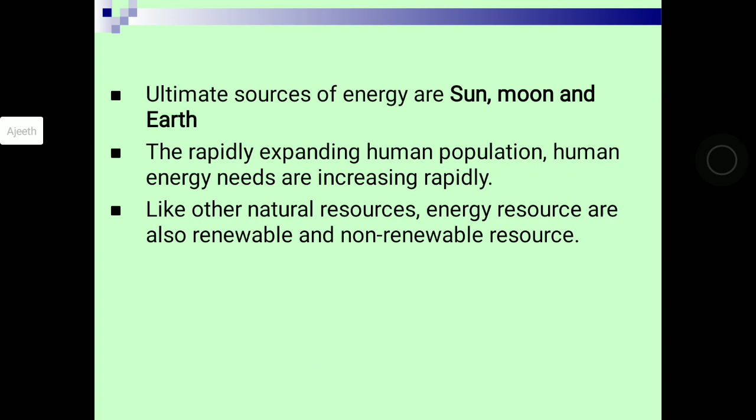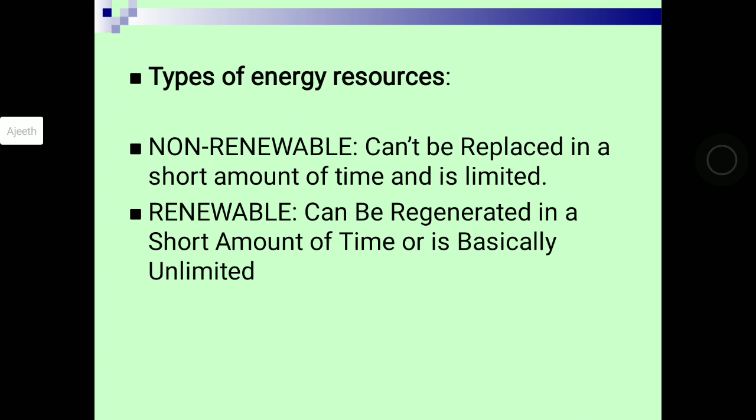So, types of energy sources. Just to refresh your mind: non-renewable means they can't be replaced. Renewable means they can be replaced, regenerated, or rejuvenated.

Some of the non-renewable energy sources are fossil fuels, for example coal, lignite, crude oil, natural gas, nuclear energy, uranium, thorium, and others used in fission reactions. There is something called half-life, there is radiation, and in uranium there is fission of the nucleus, which gives some energy output. It's kind of deep into the syllabus, so we will not get into that.

So, renewable energy resources: solar energy, what do we use mainly? That is electromagnetic radiation from the sun. Wind energy from moving air. Hydropower is the energy from falling water, that is nothing but kinetic energy. Tidal energy, the energy associated with the rise and fall of water. Tides are mainly created due to the gravitational push and pull because of the earth and moon.

Next, geothermal energy, the heat from underground steam. We have the core of the earth, it is very hot inside, but on the upper layer it's cool, we have to be thankful for that, so on and so forth. Then biogas energy and biomass energy, which come from waste, mainly methane gas.

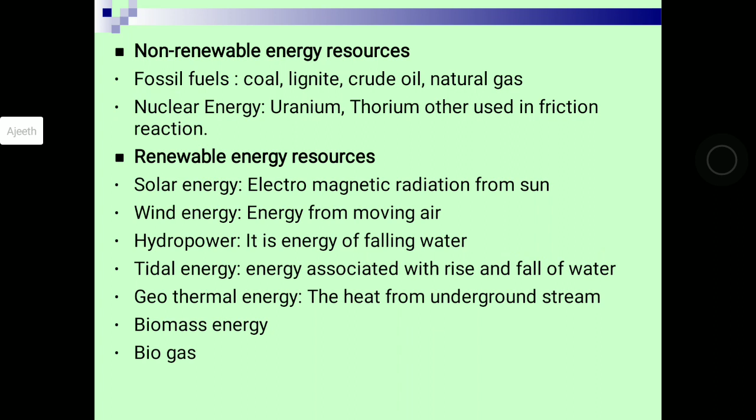So, different sources of energy, what we actually get: oil is 33%, coal 22%, natural gas 21%, nuclear power 6%, that's very less, but still there are so many disadvantages with nuclear power, so let's limit to that. Biomass or biogas 11%, hydropower, geothermal, solar and wind together 7%, that's all.

See those, oil, coal, all those things are non-renewable, and we are mainly depending on that itself. India especially is lagging behind in conservation of energy and also usage of energy in terms of oil and coal. We actually import it from other countries, we are not self-sufficient as of now, right? So in total, non-renewable energy usage is 82%, renewable is 18%.

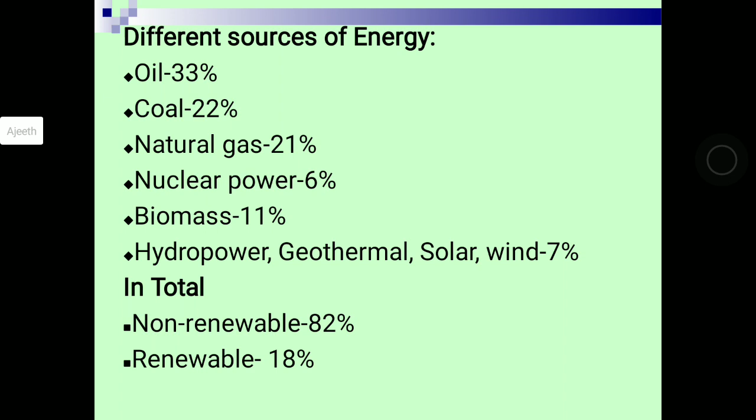So, classifications of the energy sources. Conventional sources are the ones which are used in common by all of us, for example fuels, electricity, etc. Non-conventional sources are energy resources which are not used in common. So we can't see it everywhere we go.

There are no... wind, what do we say that? Uh, tidal winds, I'm sorry, I forgot the name. Okay, we'll come back to it later. We'll take the next example.

We can't see dams everywhere, right? We can't see geothermal power everywhere. We can't see tidal energy everywhere, right? But in the same way, fuels like petrol and diesel, we can see everywhere, right?

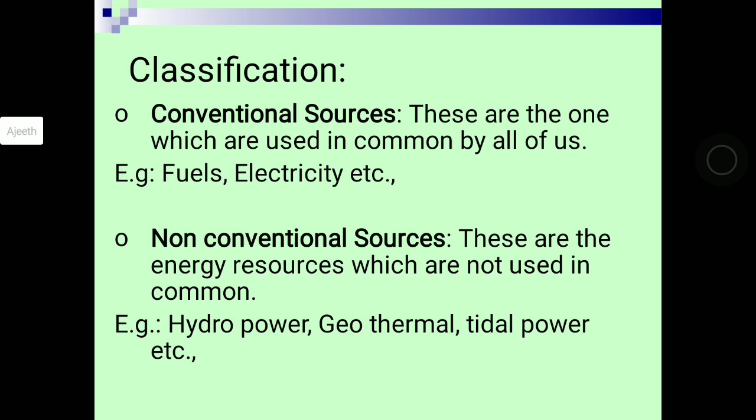So we will get deep into hydroelectric power. Electricity produced from water power is known as hydroelectric energy, as simple as that. The energy of falling water captured and converted to mechanical energy by a water wheel, that is nothing but a turbine, powered the start of the industrial revolution.

Okay, it is a good thing and a bad thing, the industrial revolution, whatever happened.

Next, large scale hydropower. In this case, a high dam is built across a large river to create a reservoir. Water is allowed to flow through huge pipes laid along steep hill slopes, controlled at rates that spin turbines.

Small hydropower involves a low dam with no reservoir, or only a small one, built across a small stream, and water is used to spin a turbine to produce electricity. Even smaller than dams, these are called bunds. Approximately one-fourth of the world's electricity is produced by hydropower, so that's a good thing.

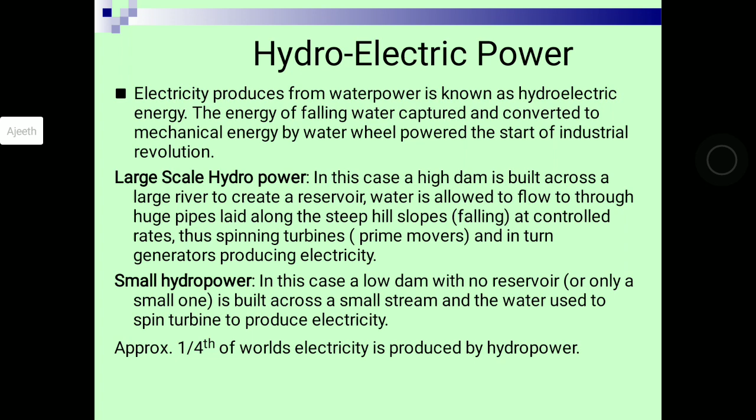In India, the generation of hydroelectricity has been emphasized right from the beginning of the first 5-year plan. Those were the agendas in the first 5-year plan. By the end of the fourth plan, India was able to generate 6.9 thousand megawatts of hydroelectricity, contributing 42% of total power generation capacity. That is huge, that is a good thing.

But due to increasing demand, by the end of the 8th plan, it fell down to 25%. The population growth is very high in India, so that has to be controlled first. But that is the problem we have been facing, and in turn it is indirectly affecting electricity production also.

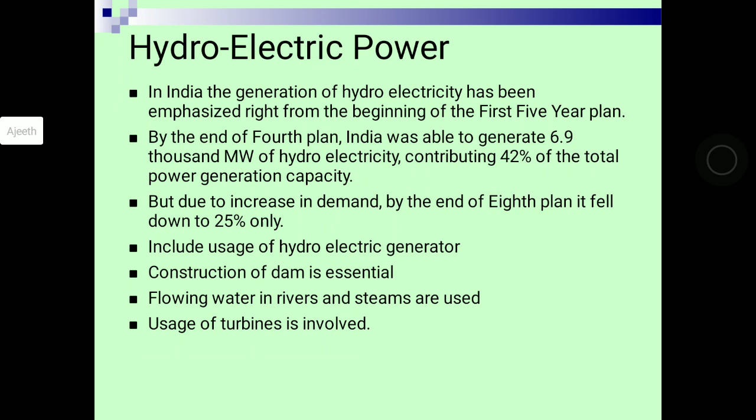So this includes the use of hydroelectric generators. Construction of a dam is essential. Flowing water in rivers and streams is used, and turbines are involved in hydroelectric power in the scenario of India.

If you remember the resultant force, sine theta, cos theta from the elements of civil engineering, that is applied here too. If you want to see a curved dam in India, you can go to Idukki Dam in Kerala. It is very beautiful, but you can't take pictures inside.

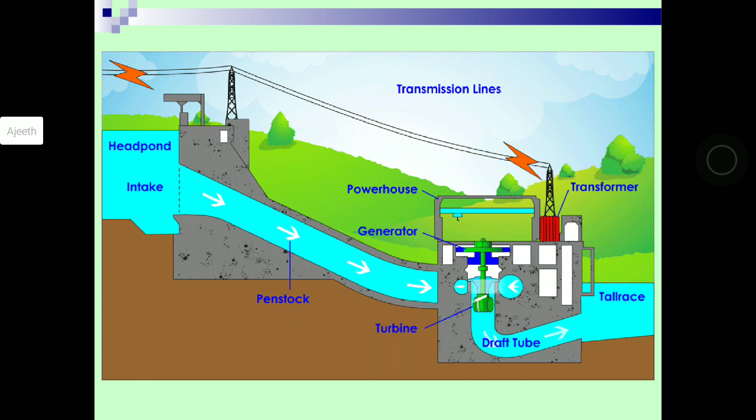Next source of energy is nuclear power. Nuclear energy is a non-renewable source of energy which is released during fission, or disintegration, or fusion, that is the union, of selected radioactive materials. So nuclear power appears to be the only hope for large scale energy requirements when fossil fuels are exhausted.

But nuclear energy again has so many disadvantages. If something goes wrong, there is a huge threat to society. So you can also watch Chernobyl.

It's a very nice mini series available on HBO, or you can also download it through torrents, I guess. It has 5 episodes. It's very good, knowledgeable and entertaining. You can watch it — in the context of nuclear power itself, I'm saying, I'm not saying don't study, binge watch it.

The major advantage is that even small quantities can produce an enormous amount of energy. A very small quantity is enough to produce a very large amount of energy. There is also something called half-life: up till a certain point it will degrade to a certain extent, and after its half-life it will degrade slower, going on for thousands and thousands of years once the fission or fusion reaction has started.

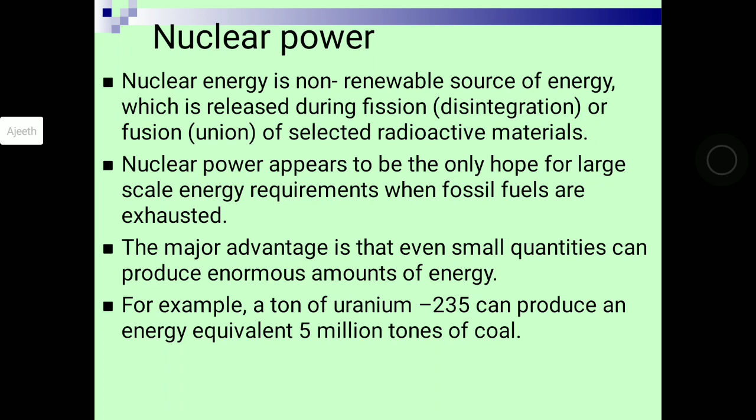Nuclear energy has been successfully used in generation of electricity in spaceships, marine vessels, and chemical and food processing industries. There is a nuclear power plant in Kaiga, which you can visit if possible.

In nuclear fission, the nucleus of certain isotopes with large mass numbers splits into nuclei of nearly equal mass, with release of enormous energy on bombarding by neutrons. I have a figure showing what actually happens. There are certain isotopes with large mass, and when they are bombarded with each other, they collapse or start to blast, and that reaction causes energy to be released, which is then taken up.

In nuclear fusion, two isotopes of lighter elements are forced at high temperature until they form a heavier nucleus, releasing enormous heat. This reaction happens so rapidly we can't actually see it, but two isotopes combine with each other to form a larger material. Because of that collision, a higher amount of heat or energy is released. Uranium, thorium, and plutonium are the major sources.

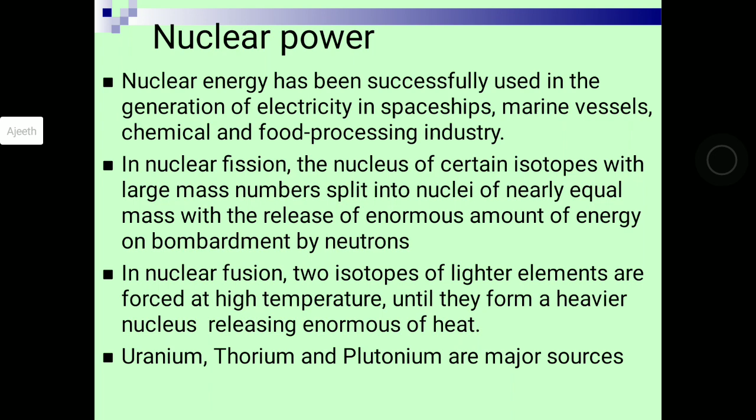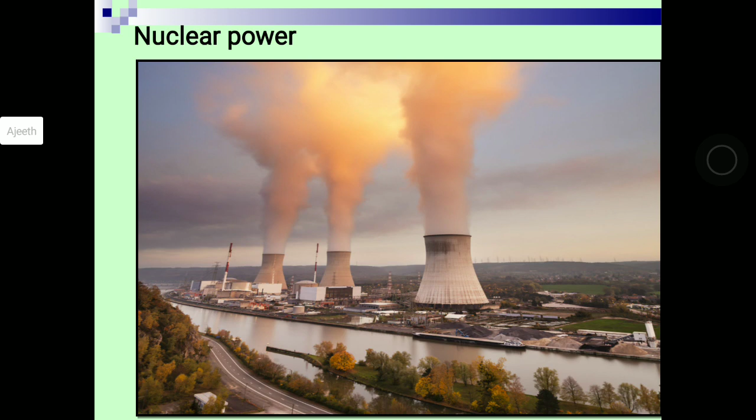This is a beautiful picture of a nuclear power plant. As you can see, these are the cooling towers. Whatever gas-like thing is coming out is not smoke and is not polluting anything. Because of the heat generated, cooling of the towers has to be done, and at that time we get an enormous amount of water vapor. So this is all water vapor, not pollution. Please keep in mind, this is not gas, not a harmful product, just water vapor, which is completely harmless.

So this is how it is. There is a neutron and a target nucleus. The white one is the neutron, and there is a fission product. One neutron hits the target and goes out like an arrow, and because of that you can see a suppression in the target nucleus. Because of this hitting, we get energy.

Next, this is fusion. As you can see, these are the light elements, that is helium, and one more, tritium and deuterium. They both collide with each other. It is forcefully done, and when two things are combined it is called fusion, and because of the fusion we get heat or energy, as simple as that.

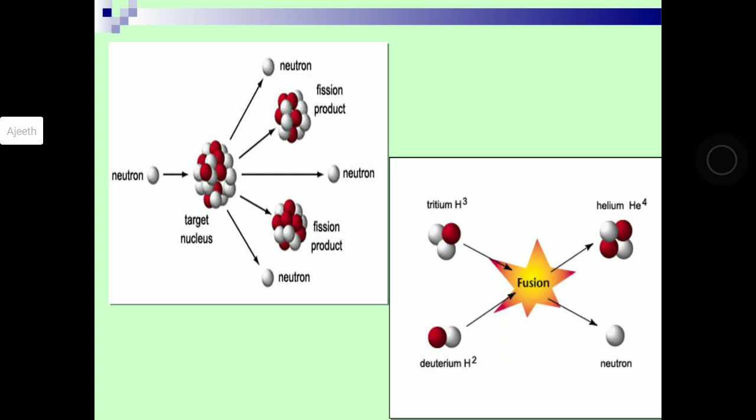Mainly in India, nuclear plants are situated in Kalpakkam in Tamil Nadu, Kaiga in Karnataka, Tarapur in Maharashtra, BARC in Mumbai, Narora in UP, and Manuguru, not Mangaluru, so Manuguru in Andhra.

So what are the hazards? If you feel the lecture is boring, please watch the Chernobyl series, you will get all the hazards actually.

Uranium mining causes radioactive pollution and health hazards for mine workers. Nuclear materials remain in the surroundings for many centuries. They are called nuclear cells, and once we are done with them, they have to be cooled down since they are radioactive elements to start with. They are very radioactive, and people cannot live with such radiation.

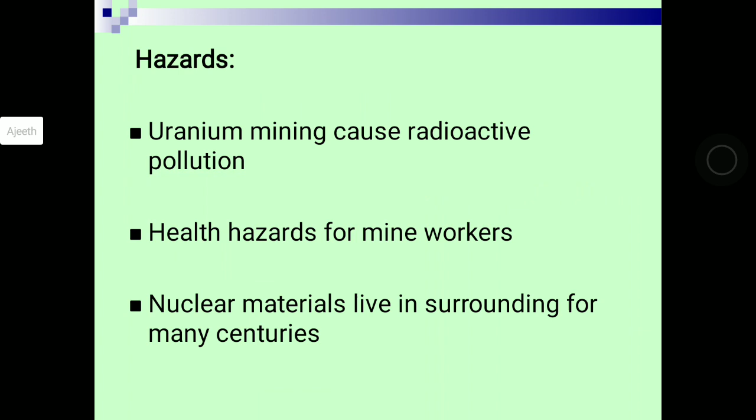On the moon and elsewhere, the radioactive energy coming from the sun is about 500 times more than on earth, it seems. I had just read it in the news two days ago. We are not actually capable of sustaining such radioactivity, so it has to be handled very carefully, cooled down, and maintained. There is so much maintenance involved.

As you can see on earth, the radiation effect is spreading. The black part, whatever you can see, is the radiation effect. However much quality control has been going on, it's not enough. There should be much more.

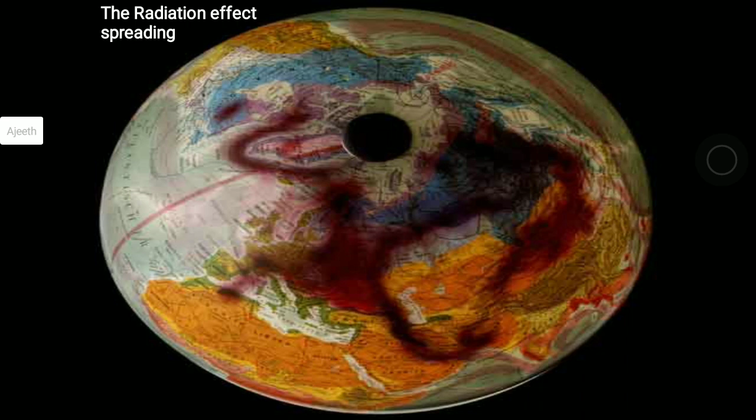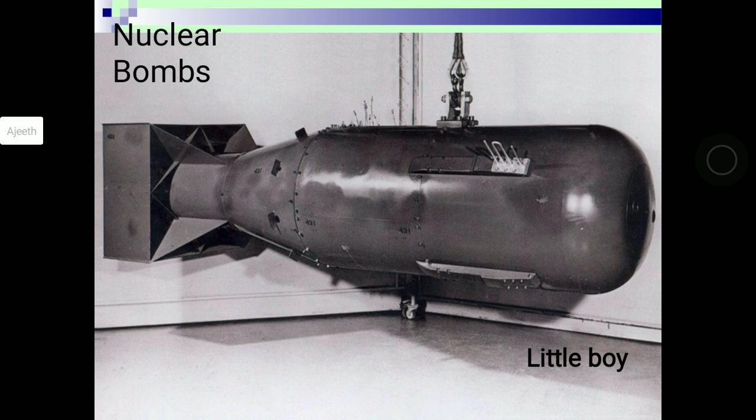The energy in the wind turns 2 to 3 propeller-like blades around a rotor. The rotor is connected to the main shaft, which spins a generator to create electricity. Wind turbines are mounted on a tower to capture the most energy. This is the main shaft, and these blades are called propellers.

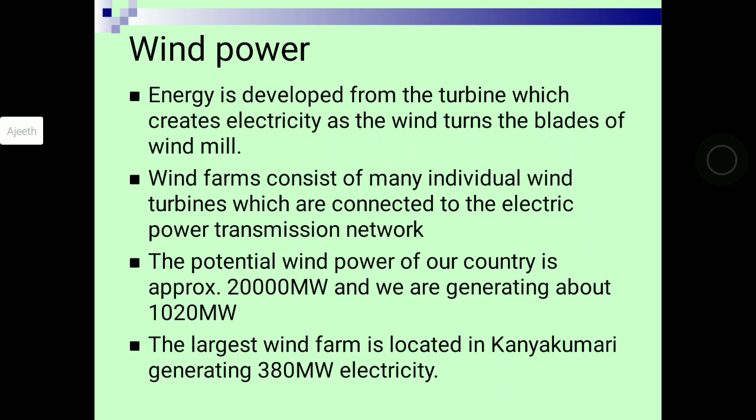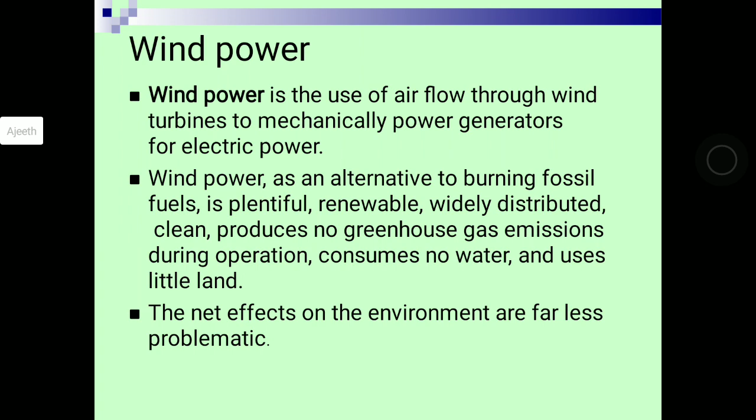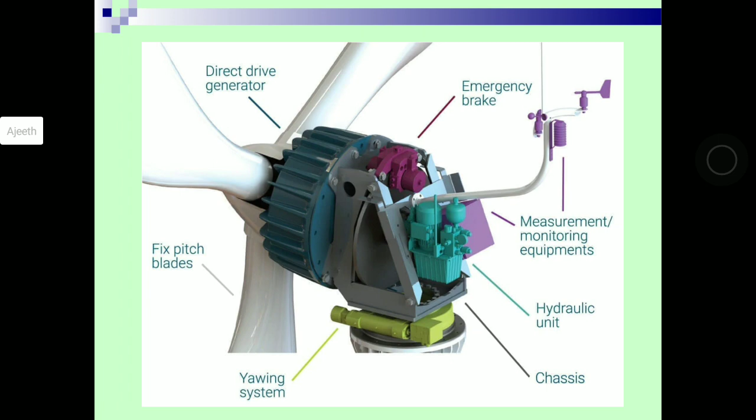As you can see, these are the fixed pitch blades. We also have the emergency brake, hydraulic unit, and chassis. This is just for your information, you can see this.

So how does a wind turbine work? A wind turbine operates on a simple principle: the energy in the wind turns the propeller-like blades around a rotor. As you can see here, this is the rotor, these are the blades, pitch, and this is the tower. You can pause the video and go through this: blades, rotor, pitch, brake, everything is named properly.

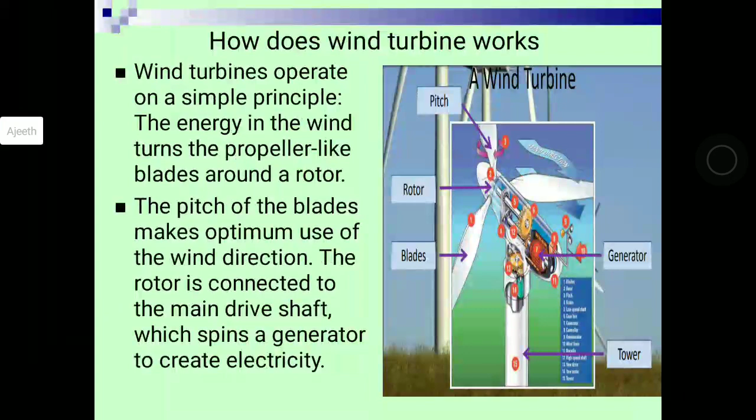The energy in the wind turns the propeller-like blades around a rotor. The pitch of the blades makes optimum use of the wind direction. The wind rotor is connected to the main drive shaft, which spins a generator to create electricity. Wind turbines are mounted on a tower to capture the most energy at 30 meters or above, so they can take advantage of faster and less turbulent wind.

If there is turbulence, the efficiency of the wind energy will be less, so that is not feasible or economical. Turbulence is low in higher ground or higher altitudes. Wind turbines can be used to produce electricity for a single home or building, or they can be connected to an electricity grid for more widespread electricity distribution.

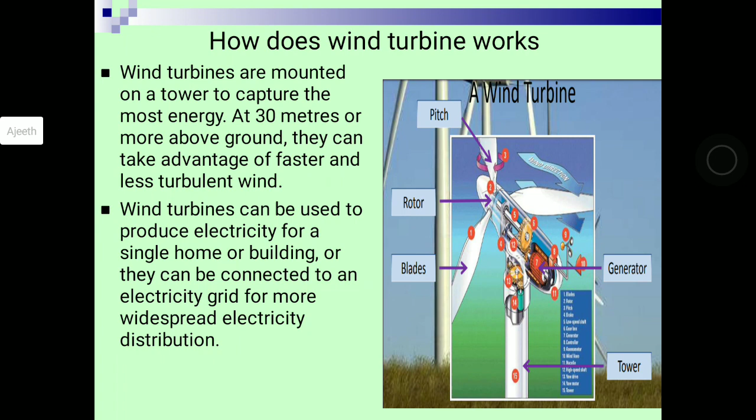Again, just for your information: onshore and offshore wind turbines or windmills. A regular onshore turbine lasts about 20 years, and an offshore wind turbine is stronger than an onshore turbine. It lasts around 25 to 30 years, producing about 50% more energy than an onshore turbine, but onshore has a cheaper foundation.

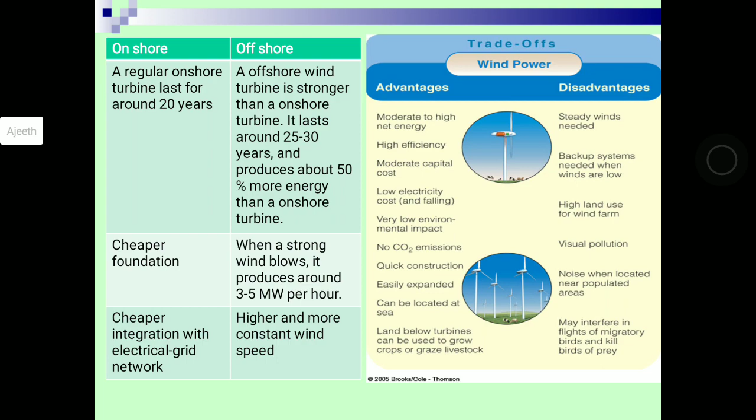Offshore, when a strong wind blows, it produces around 3 to 5 megawatts per hour. Onshore has cheaper integration with the electrical grid network, but offshore has higher and more constant wind speed. So it's mainly about trade-offs, what do we get, what do we lose, advantages and disadvantages. Let us see.

Moderate to high net energy, but it needs steady winds. It has high efficiency, but a backup system is needed when winds are low. So again we are giving energy. Moderate capital cost, but we have to use a lot of land. Low electricity cost and very low environmental impact, but there is visual pollution.

Sometimes when you go somewhere it would look good, but if you're staying there itself, it would look very bad, the windmills, right?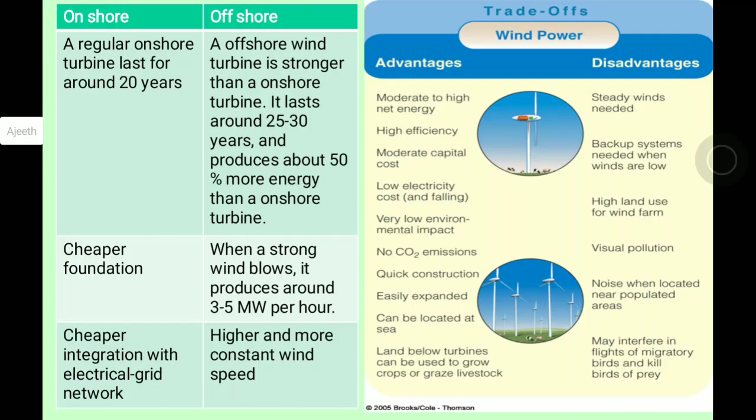But again, advantages: no CO2 emission, quick in construction, easily expandable, can be located at sea. But in the disadvantages, again, noise when located near populated areas because of the turning of propellers, right? And also interference with birds or migration of birds, and many birds are killed during the generation of wind energy.

Let's go to the next one, that is tidal energy. Ocean tides are produced by the gravitational forces of the sun and moon. There is an attraction force between sun and moon, so because of that we get tides, so that we can go to beaches like Tannirbhavi, or many other beaches in Mangalore. I can't remember it as of now, I don't know why.

So tidal power or tidal energy is a form of hydropower that converts the energy obtained from tides into useful forms of power, mainly electricity. Tidal energy is an alternative energy that can also be classed as renewable energy.

That is because you might have seen Panampur beach and all, or even Surathkal beach, or wherever the tides are always coming in. So we can see that it is a renewable source of energy, as Earth uses the gravitational force of both the moon and the sun every day to move vast quantities of water around the ocean, producing tides.

Although not yet widely used, tidal energy has potential for future electricity generation. As of now it is not used much because it has to be laid in the tides or in the deep ocean, so humans are not very advanced yet to take maximum efficiency out of that.

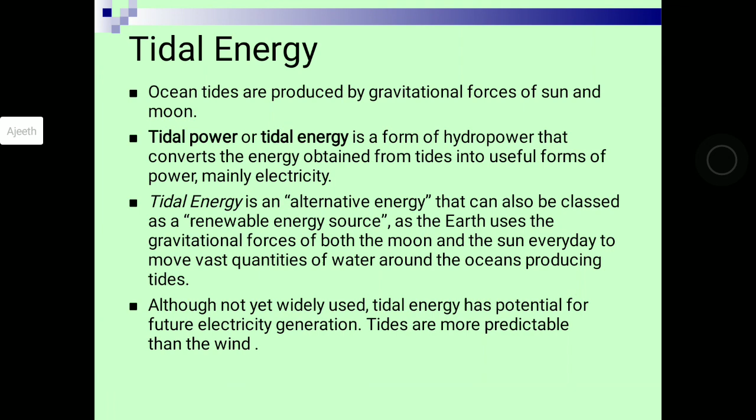Tides are more predictable than wind, so that is a good thing. Since the position of the earth and the moon with respect to the sun changes throughout the year, we can utilize the potential energy of water contained in the daily movement of rising and falling sea level to generate electricity.

The generation of electricity from tides is similar in many ways to hydroelectric generation. The difference this time is that water flows in and out of the turbine in both directions instead of just one forward direction. A difference of several meters is required between the height of high tide and low tide to spin the turbines.

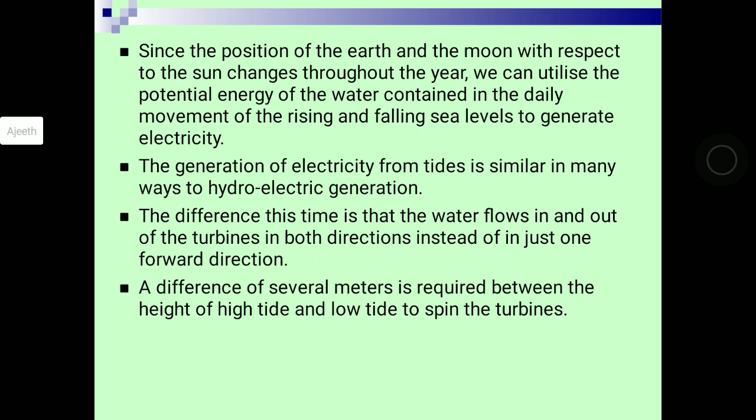I will show the picture or a GIF so that you can understand it more easily. As you can see, 1, 2 and 3: first, the water moves in and out past the turbine as tides ebb and flow. Next, turbines turn the generator module, producing electricity. Third, electricity is returned by underwater cables for use ashore. That's all, it's a very easy one, right?

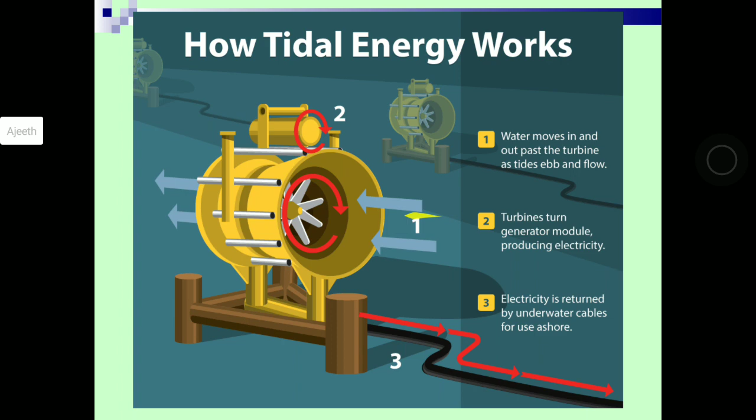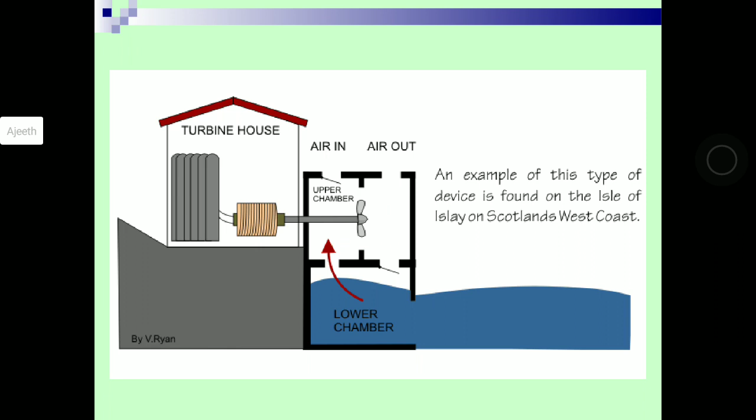So there is always tides and there can be energy throughout. This is one of the better pictures. As you can see, there is a turbine house, there is air in, air out. An example of this type of device is found at the Isle of Islay in Scotland's west coast. As you can see, there are tides, and because of that the whole thing will be filled with water and the turbines will move.

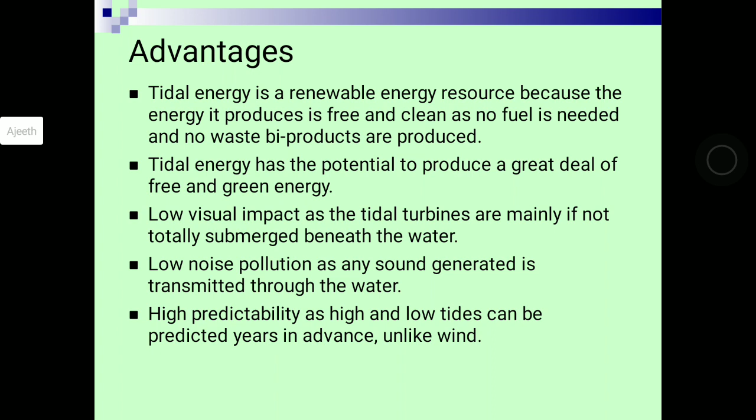So what are the advantages? Tidal energy is a renewable energy resource because the energy it produces is free and clean, as no fuel is needed and no waste byproducts are produced. Tidal energy has the potential to produce a great deal of free and green energy. It has low visual impact, as tidal turbines are mainly or totally submerged beneath the water. We want the tides to be moving vigorously so that there will be spinning of the turbine. Next, low noise pollution, as any sound generated is transmitted through water. High predictability, as high and low tides can be predicted years in advance, unlike wind.

Now we will come to the disadvantages. Tidal energy is not always a constant energy source, as it depends on the strength and flow of tides. We want tides to be vigorous, but they will not always be so strong. Tidal energy requires a suitable site where the tides and tidal streams are consistently strong, and equipment must withstand the forces of nature, resulting in high capital construction and maintenance cost.

As you know, it is seawater, and seawater has salts which cause corrosion, so there is high maintenance. It also gives danger to fish and other sea life, as they get stuck in the barrage or sucked through the tidal turbine blades. So animals get hurt, and when fish migrate from one place to another, they usually get confused.

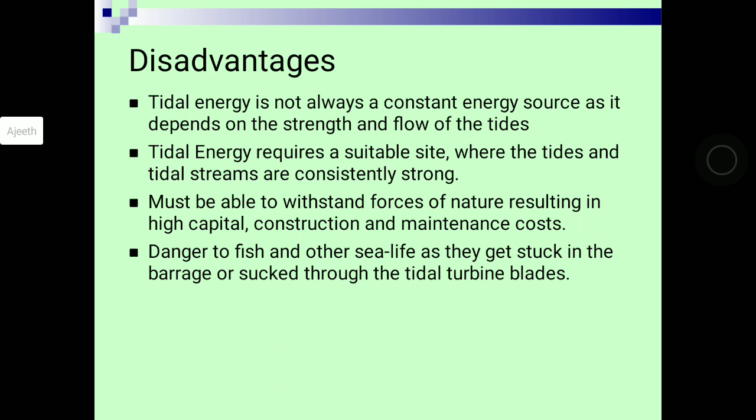So next, another kind of renewable energy we can take is electromagnetic radiation. Electromagnetic radiation is energy in the form of waves due to changing electric and magnetic fields. Where is it coming from? The sun. There are different forms of electromagnetic radiation, each with different wavelengths. Cosmic rays, gamma rays, X-rays and ultraviolet radiation are known as ionizing radiation because they have energy to knock electrons from atoms and change them into positively charged ions. So they are very, very dangerous.

They are dangerous to human beings if exposed for a high or certain amount of time. But as of now, we have the ozone layer and the atmosphere, which are protecting the earth from harmful radiations of the sun. The resulting highly reactive electrons and ions can disturb living cells, interfere with body processes, and cause many types of sickness, including various cancers.

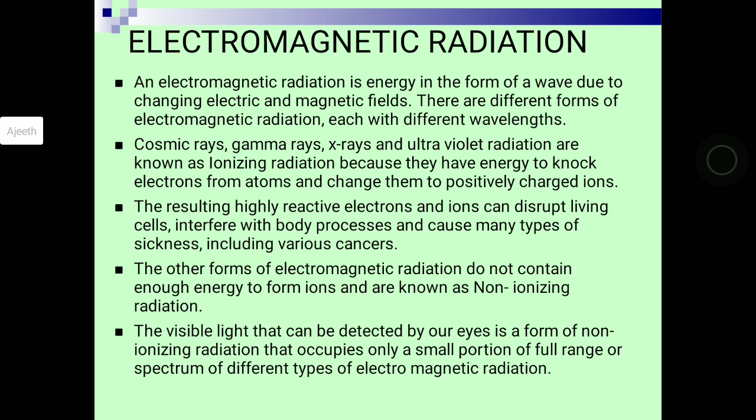The other forms of electromagnetic radiation do not contain enough energy to form ions and are known as non-ionizing radiation. The visible light detected by our eyes is a form of non-ionizing radiation from the sun, which is not ionizing, so it is not hurting us. It occupies only a small portion of the full spectrum of electromagnetic radiation. High energy radiation has short wavelengths so it can penetrate through material, while low energy radiation has long wavelengths and is non-ionizing.

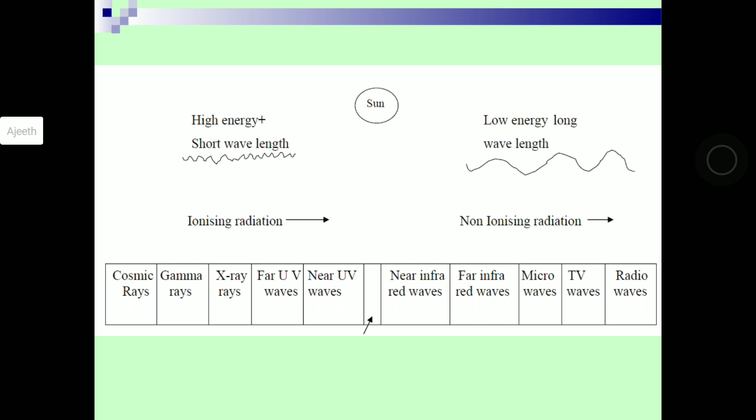So ionizing radiations are cosmic rays, gamma rays, X-rays, UV waves - that is far UV waves and near UV waves. The arrow shows where our human eye can see. After that, non-ionizing radiation includes near infrared waves, far infrared waves, microwaves, TV waves and radio waves. You can hear Radio Mirchi or Red FM because of radio waves, and TV waves - now it is all dish, but before that it was with antennas. Microwaves are used to cook food, and infrared waves are used in the remote controls of TVs.

Next we will go to non-renewable resources, that is fossil fuels. Fossil fuels are energy-rich substances that formed from the remains of organisms that lived 200 to 500 million years ago. If you are a paleontologist, you would know about the dinosaurs as well. During this stage of Earth's evolution, large amounts of dead organic matter collected over millions of years. This matter was buried under layers of sediment and converted by heat and pressure into coal, oil and natural gas.

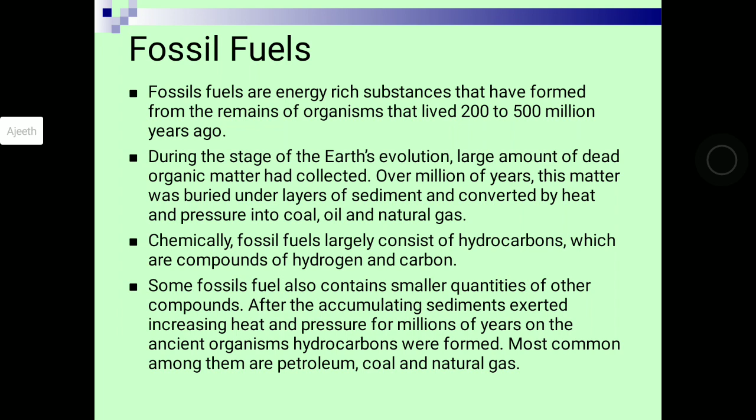Chemically, fossil fuels largely consist of hydrocarbons, which are compounds of hydrogen and carbon - that's what they have. Some fossil fuels also contain smaller quantities of other compounds. After accumulation, sediments exerted increasing heat and pressure for millions of years on the ancient organisms, and hydrocarbons were formed. The most common among them are petroleum, coal and natural gas.

The majority of fossil fuels are used in transportation, industries, heating and generation of electricity. Crude petroleum is refined into gasoline, diesel and jet fuel that power the world's transportation system. Coal is mostly used in generation of electricity, what we call thermal power. Natural gas is used for commercial and domestic purposes like heating, air conditioning, and as fuel for stoves and other heating appliances.

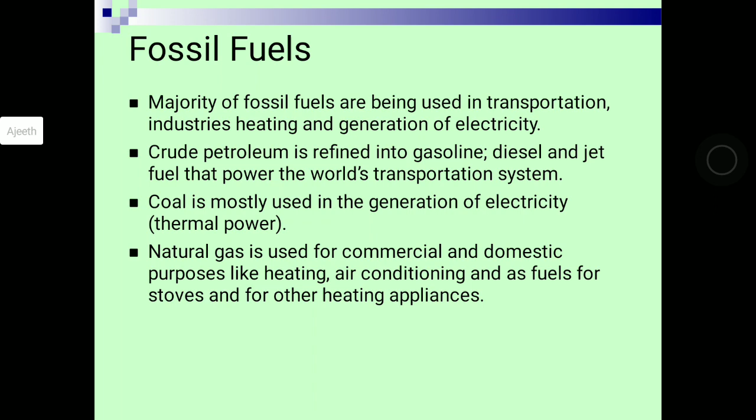So next, after fossil fuels, we come to coal. Coal is a solid fuel formed in several stages as buried remains of land plants that lived 300 to 400 million years ago and were subjected to intense heat and pressure.

Due to intense heat and pressure, organic matter got converted into coal over millions of years. There are three main types: anthracite, bituminous and lignite. Anthracite has 90% carbon, bituminous coal has 85% carbon, and lignite has 70% carbon.

Transportation and combustion of coal leads to air pollution. The more carbon content, the more pollution. Purification may lead to secondary pollution again, as there are always byproducts involved, so we skip the purification part too.

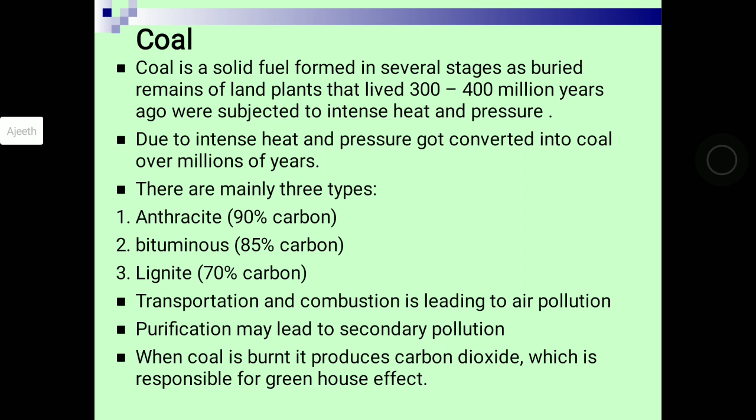When coal is burnt, it produces carbon dioxide, which is responsible for the greenhouse effect.

Almost 27350 billion metric tons of known coal deposits occur on our planet, out of which 56% are located in Russia, 28% in USA and Canada. India has only 5% of the world's coal reserves, and that too not of very good quality in terms of heat capacity. West Bengal, Jharkhand, Orissa, Andhra Pradesh, Madhya Pradesh and Maharashtra are the major coal producing states in India.

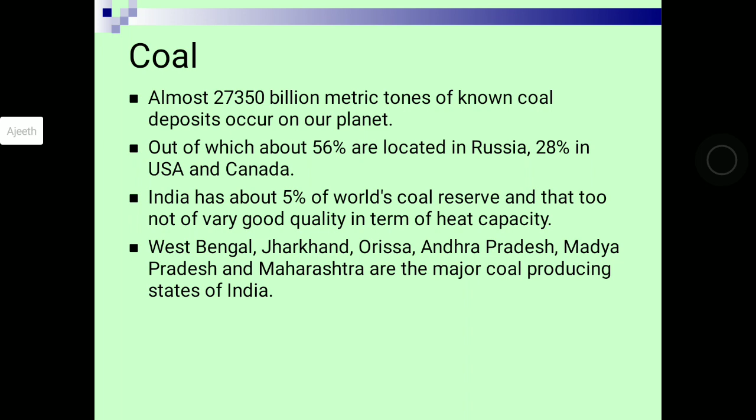Now we come to the next fossil fuel, that is petroleum. Petroleum is a naturally occurring yellow to black liquid found in geological formations beneath the earth's surface. It is commonly refined into various types of fuels. Components of petroleum are separated using a technique called fractional distillation.

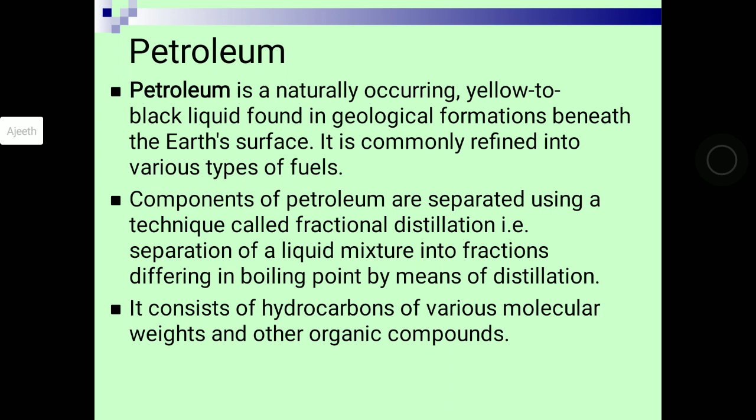With various heat levels, we get various byproducts, which are in turn taken up in fractional distillation. You might have studied this in second PU chemistry. It involves separation of liquid mixtures into fractions differing in boiling points by means of distillation. It consists of hydrocarbons of various molecular weights and other organic compounds.

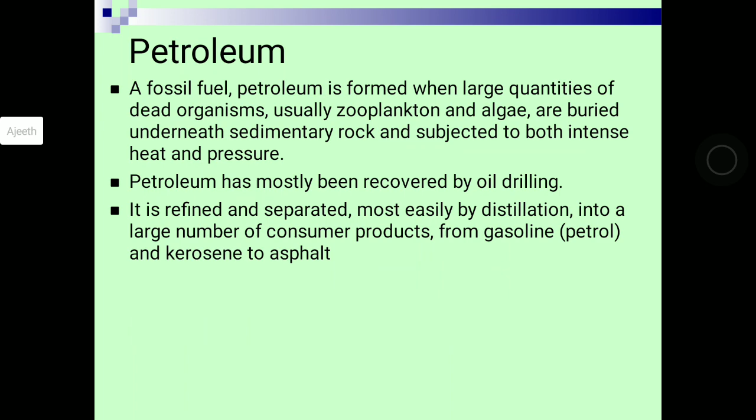Petroleum is formed when large quantities of dead organisms, usually zooplankton and algae, are buried underneath sedimentary rock and subjected to intense heat and pressure. It has mostly been recovered by oil drilling, and is refined and separated most easily by distillation into a number of consumer products, from gasoline and kerosene to asphalt.

This is a complete slide for fractional distillation. Fractional distillation differs from simple distillation in that it separates a mixture into a number of different parts called fractions. It mainly consists of a tall column fitted above the mixture, with several condensers coming out at different heights, as you can see in the picture.

The column is hot at the bottom and cool at the top. Substances with high boiling points condense at the bottom, and those with low boiling points condense at the top, since they have different boiling points. The substances in crude oil can be separated using fractional distillation: the crude oil is evaporated and its vapors allowed to condense at different temperatures in the fractionating column. Each fraction contains hydrocarbon molecules with a similar number of carbon atoms.

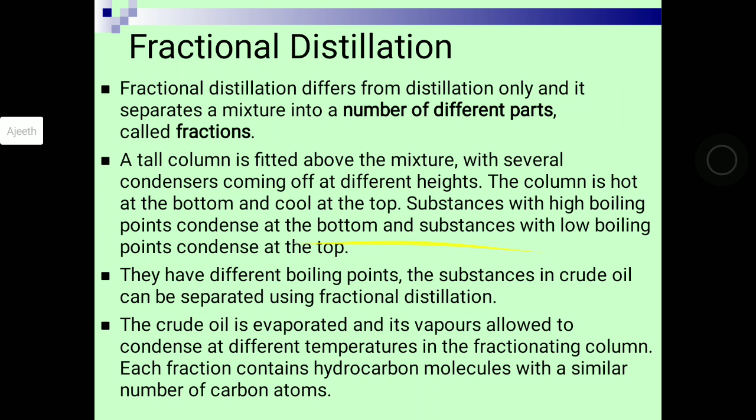As you can see in this beautiful picture, the main fractions include refinery gases, gasoline, naphtha, kerosene, diesel oil, and fuel oil residue that contains bitumen. These fractions are mainly used as fuels, although they have other uses too. Hydrocarbons with small molecules make better fuels than those with large molecules because they are volatile, flow easily, and are easily ignited.

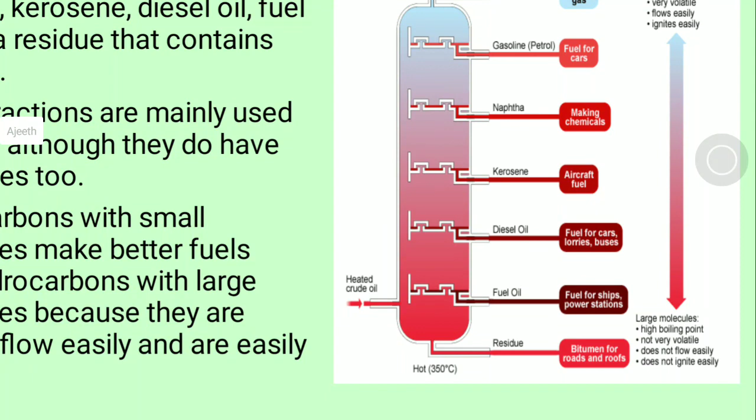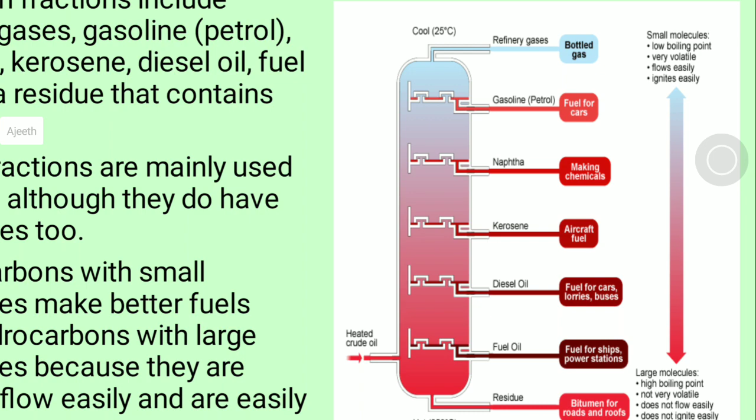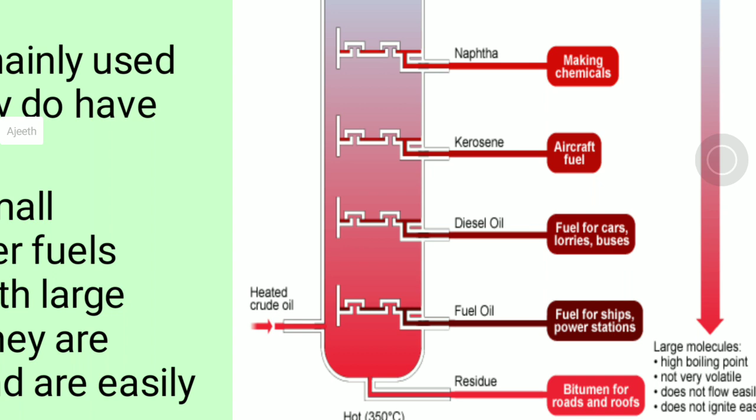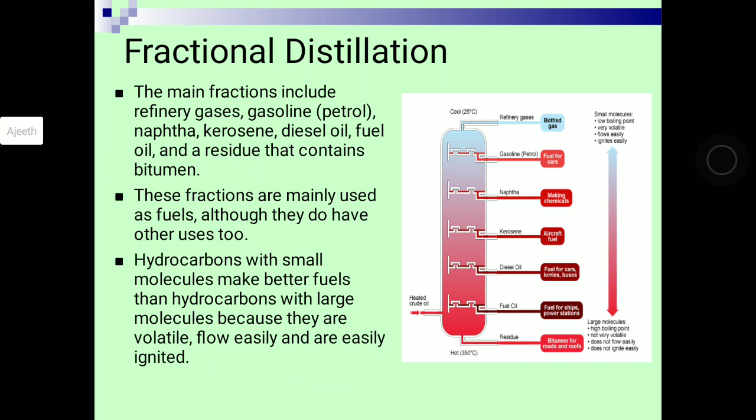As you can see in the picture, at the bottom it is very hot, and the temperature subsequently decreases as it goes up the pipe. The first and most heated byproduct is fuel oil, used for ships and power stations. Next is diesel oil, fuel for cars, lorries and buses. Then kerosene, used for aircraft fuel. Naphtha is mainly for making chemicals. Gasoline is fuel for cars, and that's why petrol is very pure—it takes much time to condense and form.

Next is natural gas, a better fossil fuel for use due to its environmentally friendly nature and efficiency—LPG gas, for example, is mainly methane. Natural gas is a mixture of light hydrocarbons including methane, ethane, propane, butane, and pentanes. It is the least pollutant due to its low sulfur content, making it the cleanest source of energy.

Natural gas doesn't actually have any smell. The smell is added by LPG companies so that we can recognize if there is a gas leak, which could pose a danger to the family.

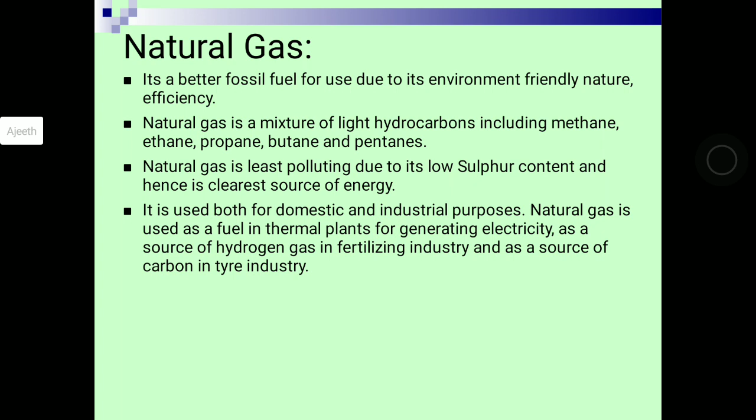It is used in both domestic and industrial purposes. Natural gas is used as a fuel in thermal plants for generating electricity, as a source of hydrogen gas in the fertilizing industry, and as a source of carbon in the tire industry. The primary component of natural gas is methane, which is highly flammable, burns easily and emits little air pollution.

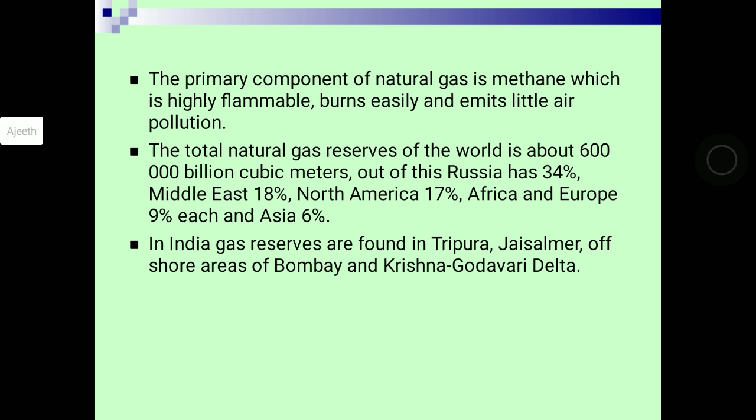The total natural gas reserves of the world is about 600 000 billion cubic meters. Out of this, Russia has 34%, Middle East 18%, North America 17%, Africa and Europe 9% each, and Asia has 6%. In India, gas reserves are found in Tripura, Jaisalmer, offshore areas of Bombay, and the Krishna Godavari Delta.

What are the basic effects of using fossil fuels? The first thing is acid rain - there is a whole module on this topic. When fossil fuels are burned, sulfur, nitrogen and carbon combine with oxygen to form compounds known as oxides - sulfur oxide, nitrogen oxide, carbon dioxide. When these oxides are released into the atmosphere, they react with water and result in the formation of sulfuric acid, nitric acid, and carbonic acid. These acids can harm the biological quality of forests, soils, and lakes. They come out from the top of clouds, which is actually horrible. If you have seen acid rain - thankfully we haven't seen it anywhere in the Mangalore area.

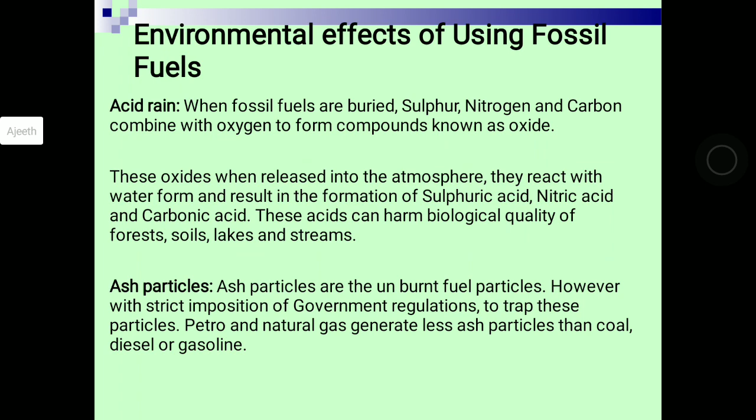Next, ash particles - these are the unburned fuel particles. However, with strict imposition of government regulations to trap these particles, petrol and natural gas generate fewer ash particles than coal, diesel and gasoline.

Next, let us come to solar energy. Solar energy originates from the thermonuclear fusion reaction taking place in the sun. It is one of the potential non-conventional energy sources - conventional sources are the fossil fuels. The earth continuously receives energy from the sun, part of which is absorbed while the remaining is emitted back into space. Solar energy, being non-polluting and non-depleting, is considered renewable energy and thus falls into the principle of sustainability.

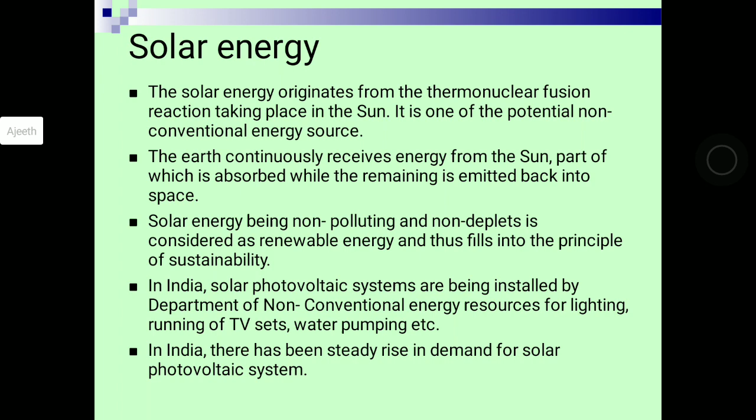In India, solar photovoltaic systems are being installed by the Department of Non-Conventional Energy Resources for lighting, running TV sets, water pumping, etc. In India, there has already been rising demand for solar photovoltaic cells - solar energy and solar cells are in high demand.

Solar cells are used to convert the impinging solar radiation directly, so that no mechanical movement of parts is needed. The sun offers an ideal energy source with unlimited supply. India is blessed with solar power of 2000 kilowatt hours per square meter per year - that is huge. The daily sunshine itself will be 5 to 7 kilowatt hours per square meter.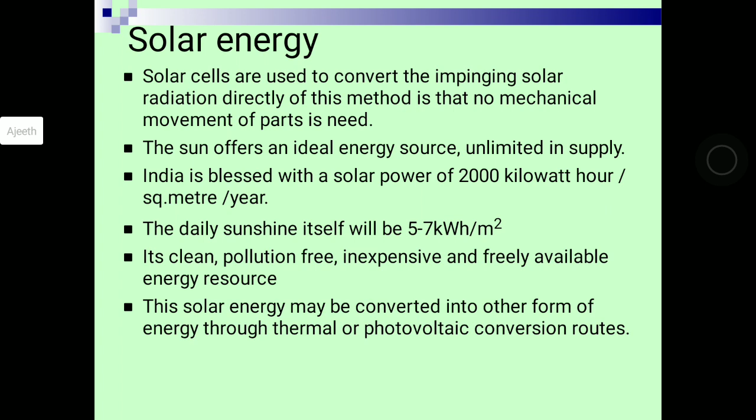It's clean, pollution free, inexpensive, and a freely available energy resource. Solar energy may be converted into other forms of energy through thermal or photovoltaic conversion routes. The various routes: first is photovoltaic cells, which use photoreceptive cells to generate electricity. Next is solar thermal, using solar panels. Next is solar air heating, solar use for heating involving fresh air.

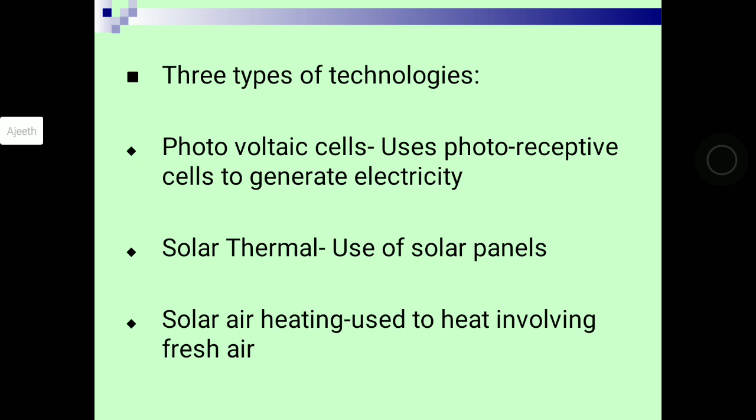Even for the keynote event of Apple, which is happening as of now on September 15th I guess - they didn't release any iPhone, but that is the Steve Jobs conventional hall I guess, which is completely powered by solar energy. This is an old picture - if I had the photo of the Steve Jobs convention hall I could have shown you. You can also see it on the internet.

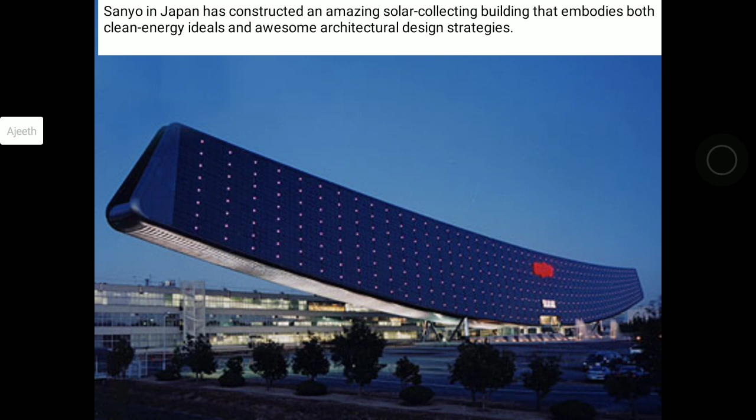So let us come to 2020. Now the company Apple is also using 100% solar energy. Next, this is how solar heating is seen and used.

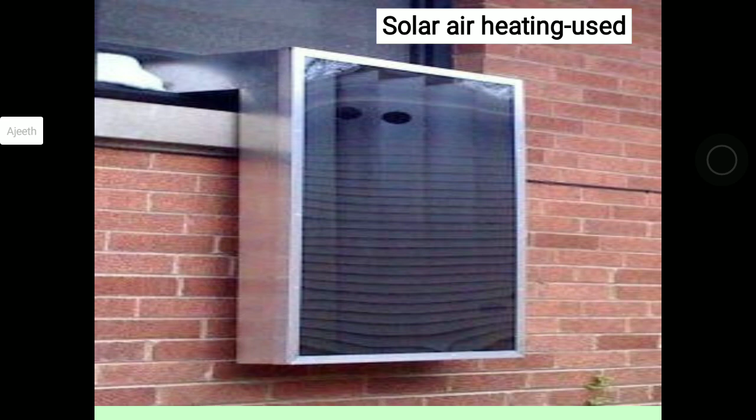Not here in Mangalore we want AC, but in Canada and all they want heaters, right? So let us switch the places.

Next, advantages of solar energy. Solar energy is free and available locally in abundance. Solar energy is pollution free. Systems are easy to install, generate and maintain. Systems can be specifically designed according to individual requirements. Supply of hot water is instant and uninterrupted.

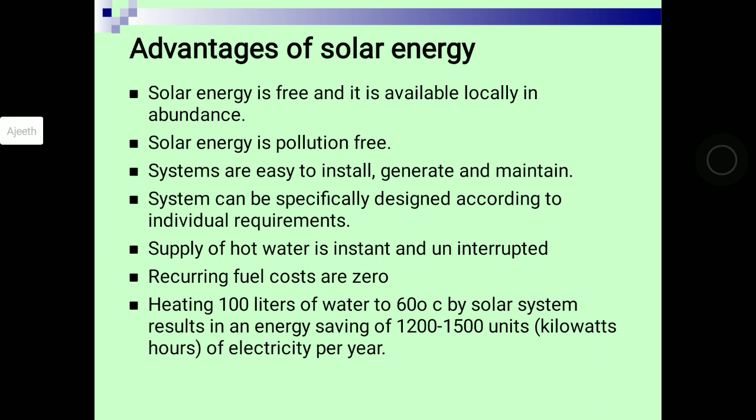Most of you might have a solar water heater. Even I have one. Recurring fuel cost is zero. Once installation is done, it is done, end of story. Heating 100 liters of water to 60 degrees Celsius by solar system results in an energy saving of 1200 to 1500 units of kilowatt hours of energy per year. So who doesn't want free things? Everyone wants free, right? Energy from the sun is free.

Next, some points about energy and India. Let us come to what is happening in India. The country has installed capacity of over 8,600 megawatts of renewable power. For the production of renewable power, India is in second position.

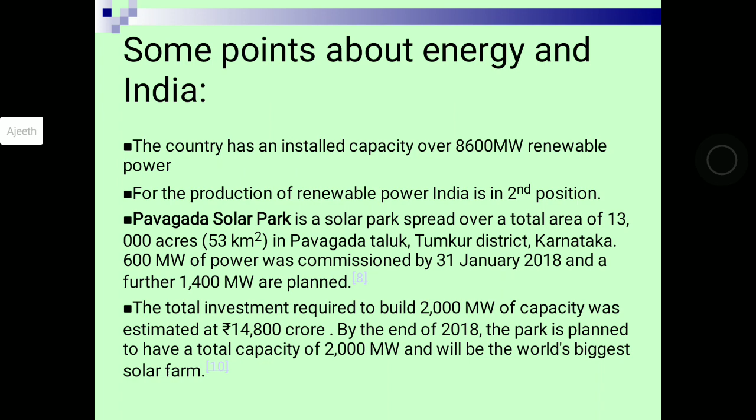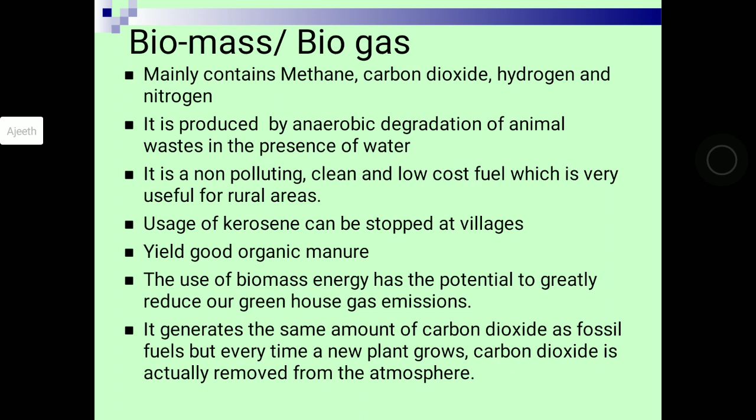It generates the same amount of carbon dioxide as fossil fuels, but every time a new plant grows, carbon dioxide is actually removed from the atmosphere. That's a great thing, right?

In SJEC, St. Joseph Engineering College, Mangaluru, your college, obviously you know, we have also constructed a biogas plant. All the waste coming from the kitchens and rooms of the ladies hostel, mainly kitchen waste, is used as fuel for the production of biogas.

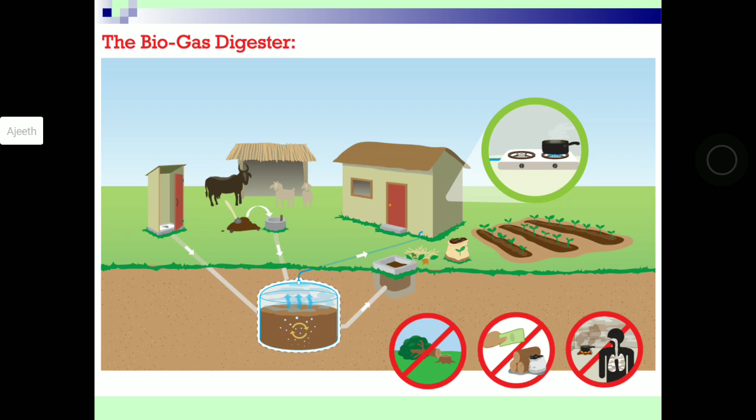The yield is used for heating of water and also for heating up of milk. Milk has to be heated so that food can be given to the students. This is how a typical biogas plant would look like. I didn't include the picture of the biogas plant in SJEC, but you can check it out once you are there in the campus.

This is the last slide. National Energy Conservation Day is celebrated on December 14th.